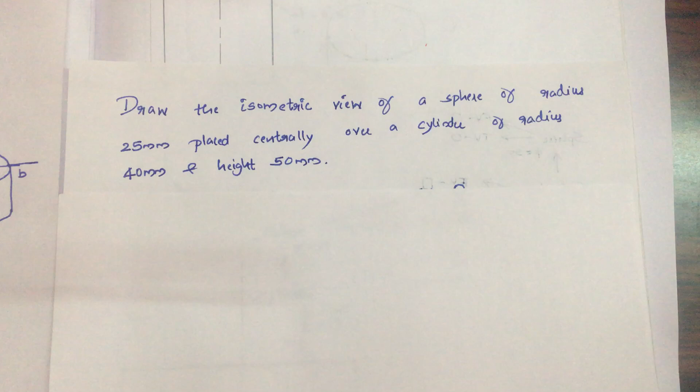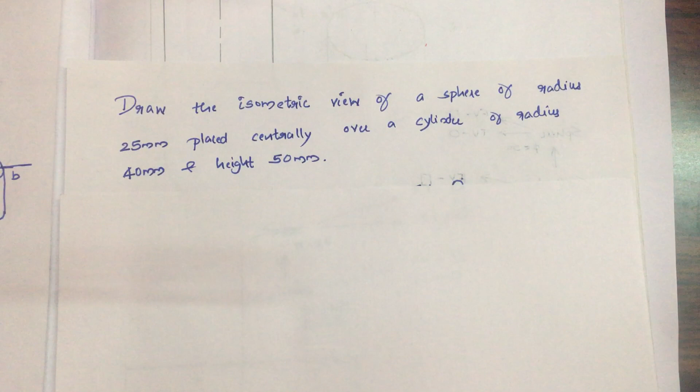In this video, we are going to discuss the isometric view of a sphere that is placed centrally over a cylinder. The dimensions of the sphere are radius equal to 25 mm and that of the cylinder is radius equal to 40 mm as well as height equal to 50 mm.

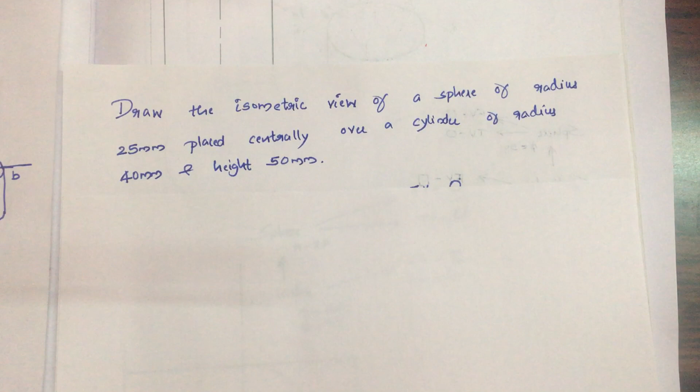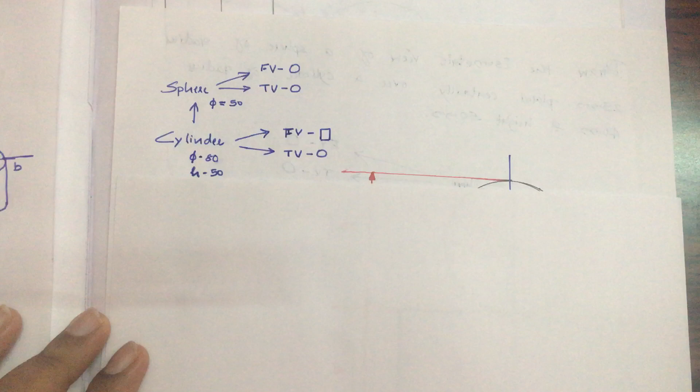From the question, we are asked to draw the orthographic projections of the cylinder as well as sphere firstly. So, initially we need to write like this. For the cylinder the front view will be a rectangle and the top view will be a circle, and for the sphere the front view as well as top view will be a circle.

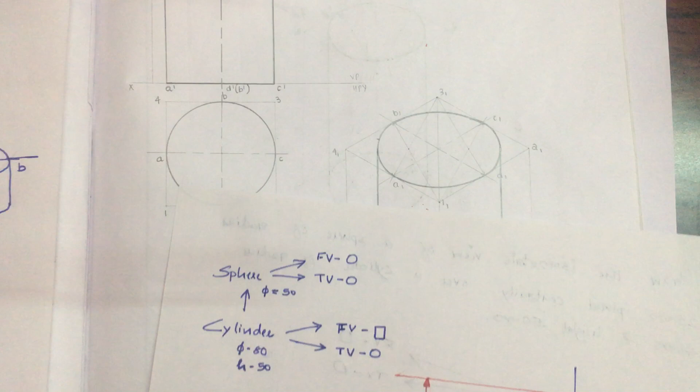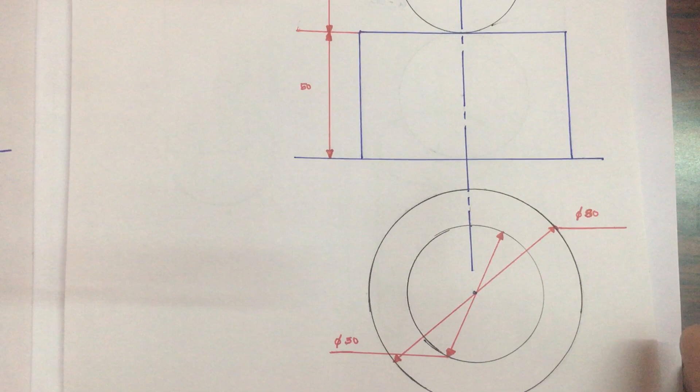And now the next step is to draw the orthographic projections of the cylinder as well as sphere. The orthographic projection of the cylinder is drawn firstly. The cylinder diameter is given as 80 mm. So, with 80 mm diameter we have to draw the circle, and a rectangle of height 50 is to be drawn, and then the top view as well as front view is complete for the cylinder.

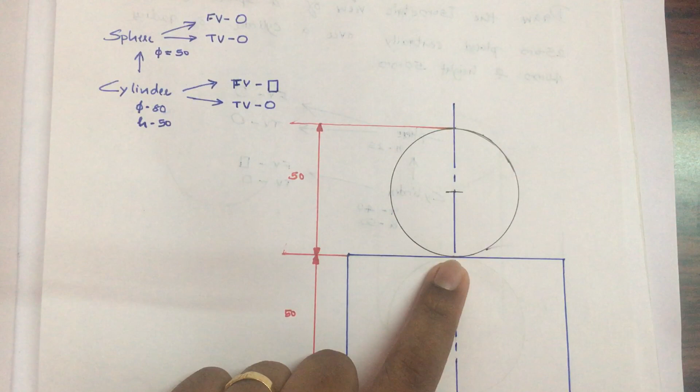After that, the next step is to draw the orthographic projection of the sphere, which will be a circle of diameter 50 drawn in the top view, and also the sphere placed over the cylinder is to be drawn here with diameter 50. So, by this the orthographic projections of the figure are complete. The next step is to start with the isometric view of the cylinder.

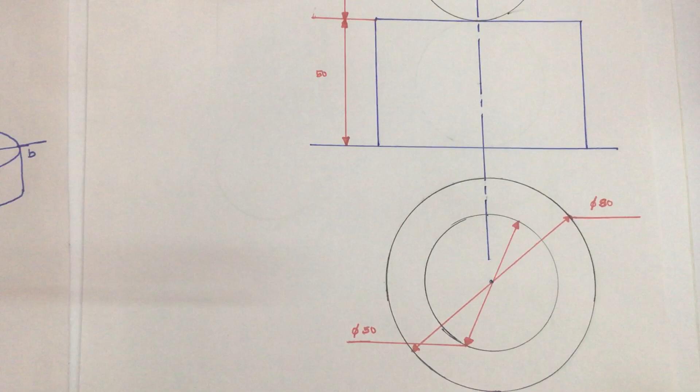In order to start with the isometric view of the cylinder, the very first step is to place the circle of diameter 80 inside the square of dimension 80 mm, and then we have to name it as 1, 2, 3 and 4. Then you have to draw a line. You have to take 30 degrees towards the left and 30 degrees towards the right, and then you have to complete the square and complete the isometric view of the cylinder.

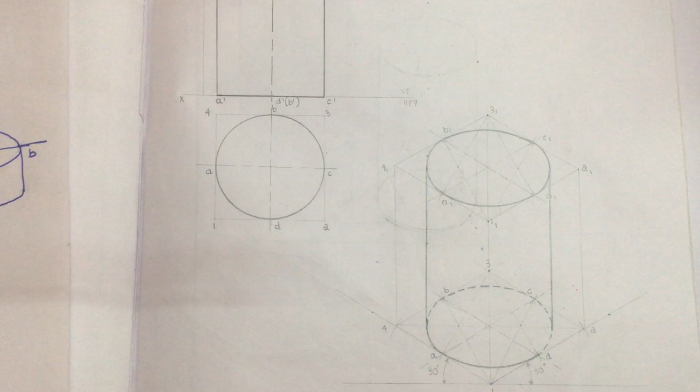The method followed in order to complete the isometric view of the cylinder was explained in the previous videos. Once you have completed drawing the isometric view of the cylinder, the next step is to place the sphere over the cylinder. You know that the diameter of the sphere is given as 50 mm. While drawing the isometric view, there is a special procedure to be followed when you are drawing the isometrics of spheres.

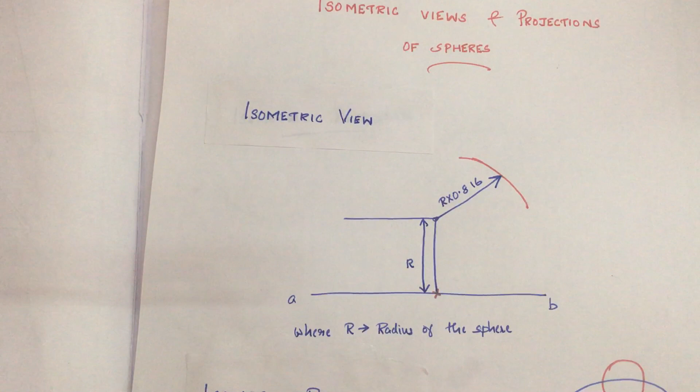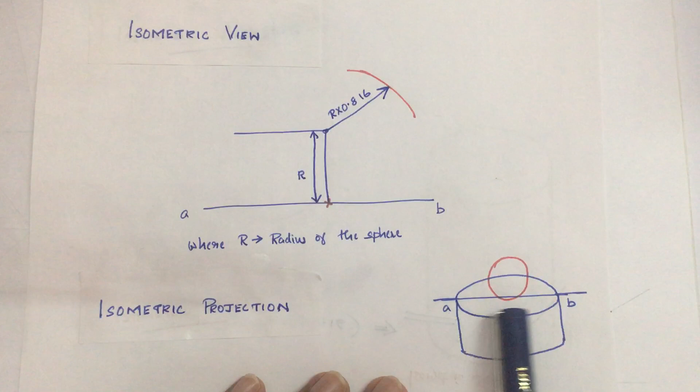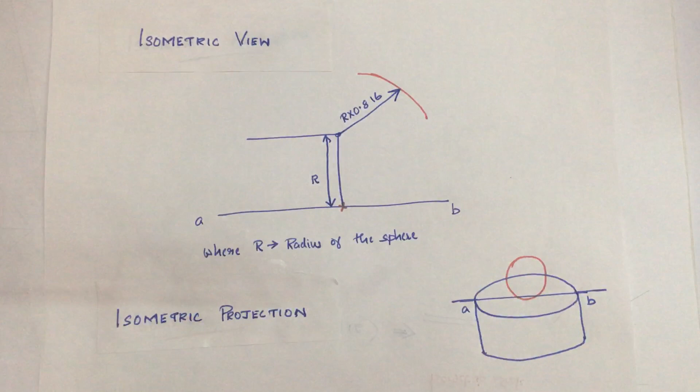After drawing the isometric view of the cylinder, you will have a center line like you see in this video, and that center line seen in the top face of the cylinder is represented as AB, and the center point of the line AB represents this particular point. From that point, you have to take the measurement R towards the vertical side. When you are taking this distance R, ensure that you are taking the radius of the sphere.

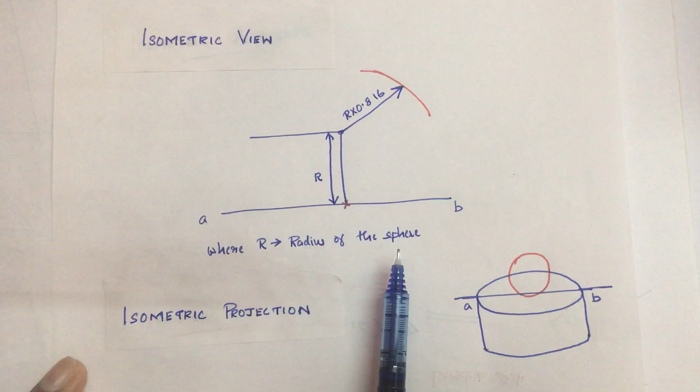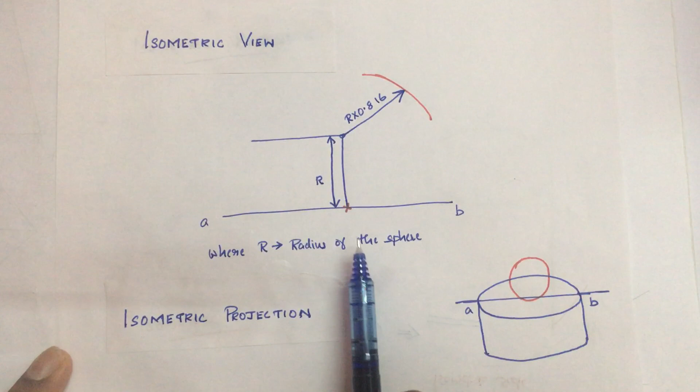When you are drawing a sphere that is placed centrally over the cylinder, please ensure that you will not commit a mistake by taking the radius of the cylinder. When you are drawing the isometrics of spheres, ensure that you are correctly taking the radius of the sphere while taking the conversions of measurements.

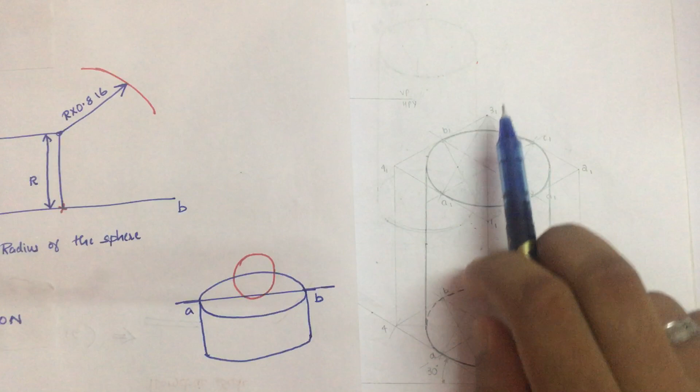So, here, from this point you have to take the radius, which is given as 25. From this point you have to take 25 mm, and you will get a point. With that point as center and with R × 0.816 as radius, you have to draw the circle. That means 25 × 0.816 as radius, you draw the circle, and that completes our figure.

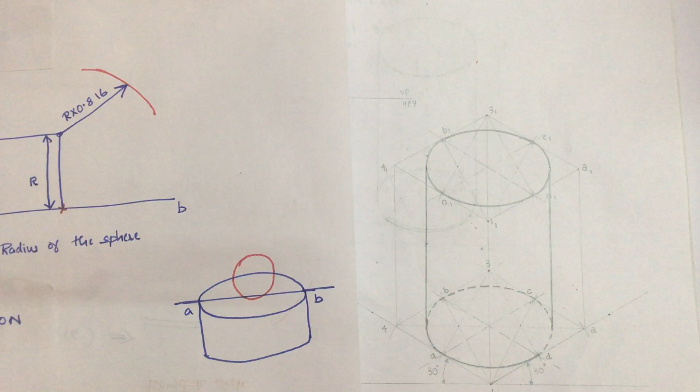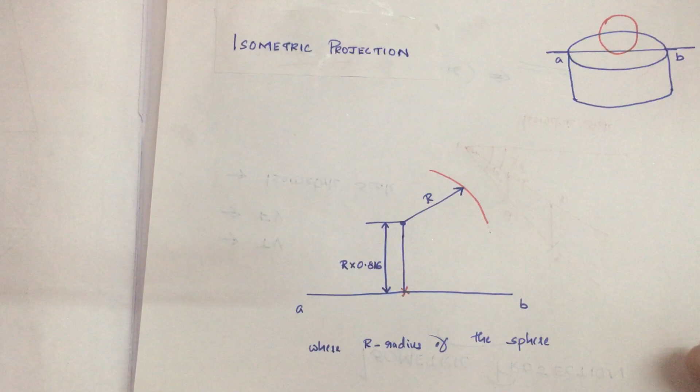So, after completing the cylinder, you have to identify the center point, and this is the methodology you have to follow. Whereas, if an isometric projection is asked in the question, then the methodology is just the opposite. The vertical distance you have to take is R × 0.816, and the radius of the circle you draw is capital R, which represents the radius of the sphere.

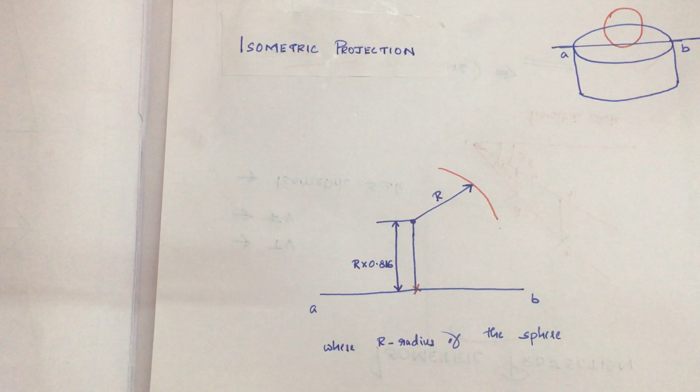So, while you are drawing the isometrics of spheres, ensure that you do not make mistakes in the measurements taken in the isometric view as well as the isometric projection.